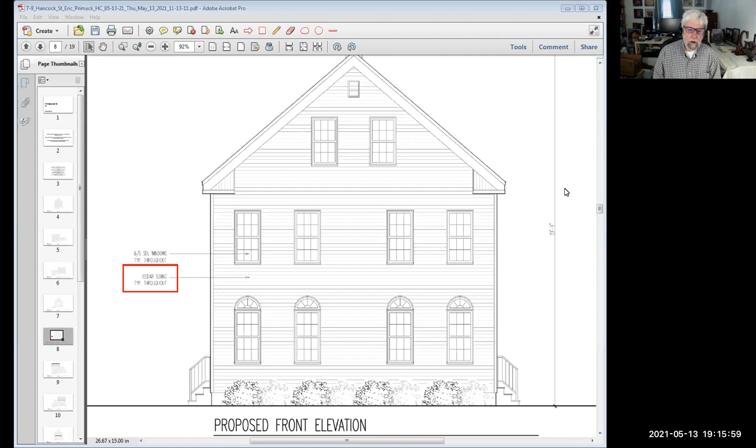Somewhere I saw, I'm not sure where, that some of the existing windows were true divided light, but it's not clear - my memory is failing me on that. Are all the existing windows SDL windows, Eric? They are. So one of the questions some board members had was, which, if any, of the existing windows in the part of the house you're not affecting do you plan to replace, or have you not gotten that far yet?

Most of them are in decent shape, some are just a little older. I think one side of the house was done over several years back, and the other side wasn't. The owner lived on the left side for a long time and replaced some of his windows, so the ones on the right side are a little older.

Again, they're just replacement windows. We'll pull them out and put in the same things if they're in poor condition. Just looking at this photo, I'd be willing to place money that the two windows up in the attic space are older, possibly original to the house, and the lower ones were replacements.

Now let me turn to my fellow board members to see if someone wants to comment. I'm particularly interested in the board's opinion on this. I got the impression last week that people felt pretty strongly about the vinyl siding. Do people still feel that way?

Anyone? Oh, Joe. Yeah, I feel strongly about it. I think all of this vinyl siding should go away, including all of the trim and accessories around the windows and at the corners.

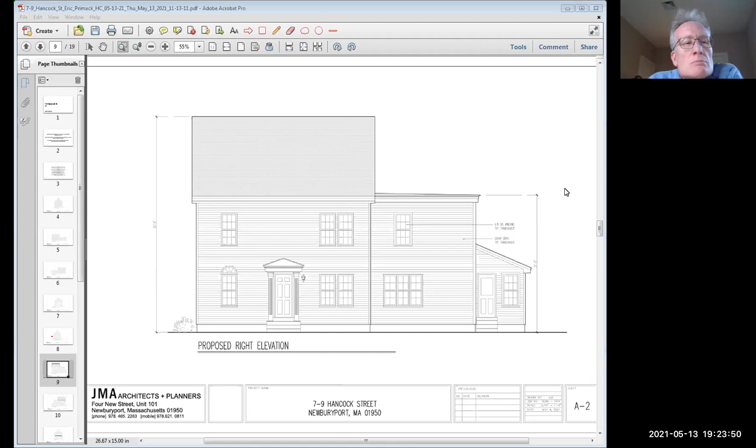Mark, you were here, your vote on this motion? Yes. Chris, you were absent, right? Yes, I'll recuse myself. Peter, you were here, your vote? Yes. Joe? Yes. Patricia was absent, I'll put her as a recusal, and the chair is also a yes. So it's a vote of 4 affirmative votes, which carries the motion.

I'll inform them - well, they're here, Caitlin and Andy are listening to all this. But I will formally let them know that the demo delay can be lifted on the basis of your revised plans, Mr. Primack. Thank you very much, and we appreciate your cooperation on this. We're aware it's going to add cost to your project, and we're not insensitive to that.

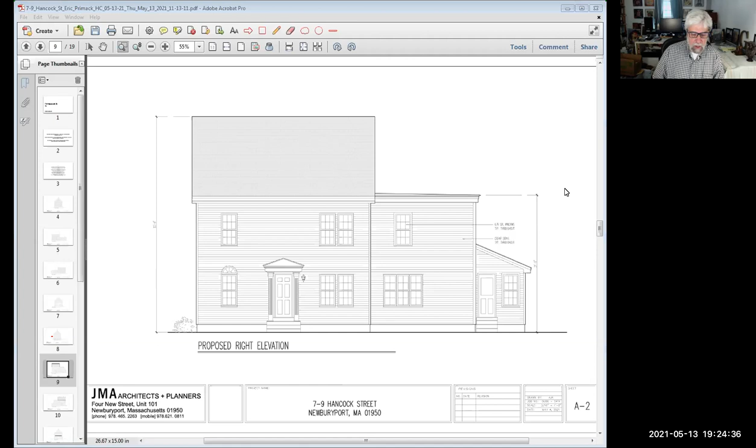Hopefully in the end people will understand why we're being persnickety about it. Okay, I get it, I'll make it look nice. Very good. Thank you very much. Bye-bye.

Okay, meeting agenda: 5 Park Street, that's a little street between High Street and Harris. The applicant is seeking to demolish an existing single-family accessory structure, a garage of some sort, and reconstruct a new one in a conforming manner - conforming to zoning restrictions for setbacks, height, and so on. So we need to do the usual considerations: determine whether the existing structure is historically significant and whether it should be considered for preservation. If we deem it significant and it should be preserved, we'll need to go into the demo plan and have a public hearing.

Who is this? I believe this is the applicant represented - yes, by MTC. Who is presenting for the applicant, the attorneys? Yes, thank you, Mr. Chair. Lisa Mead, Talerman Costa, 30 Green Street. With me this evening is Scott Brown, the architect on the project, and we're here on behalf of Boston North Development, the contractor for the owner of the property.

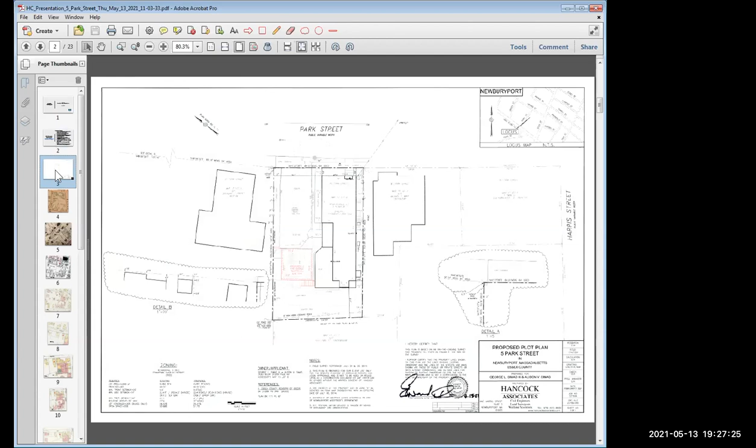So if you go to the next slide, please. So here's the site plan. This property is located in the R3 zoning district in the downtown overlay district. You can see underneath the red is the proposed new structure, and underneath that is a dashed line of the existing smaller garage that exists at the rear of the property, adjacent to the house and in between the sideline.

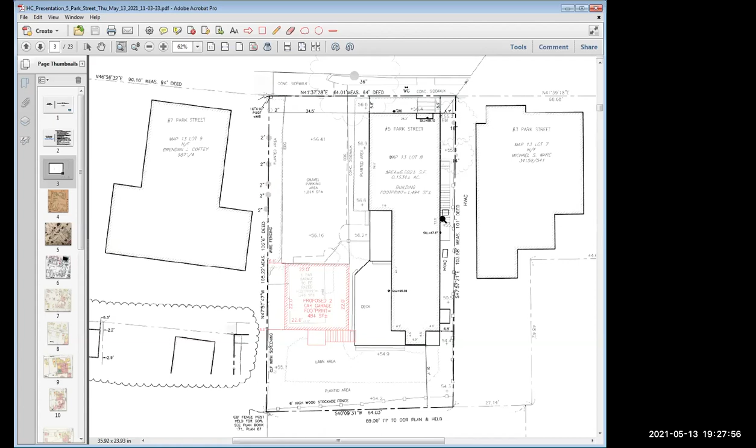Thank you. So here, as the chair indicated, Park Street runs parallel to State off of Harris and in between High and Harris. Here's the 1851 map. You can see the existing single family structure. There's no outbuilding on this map.

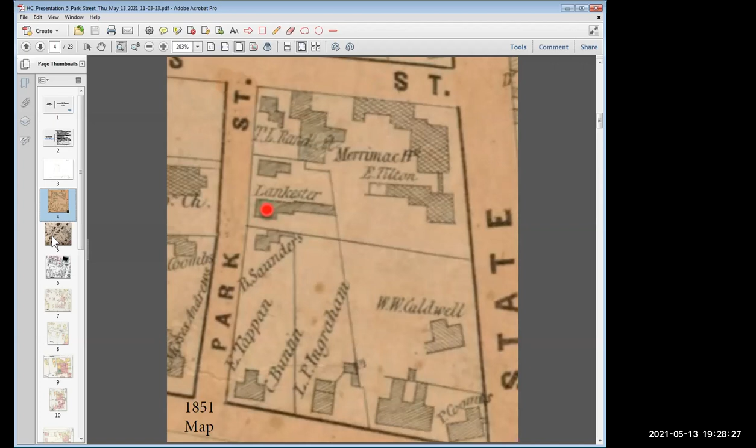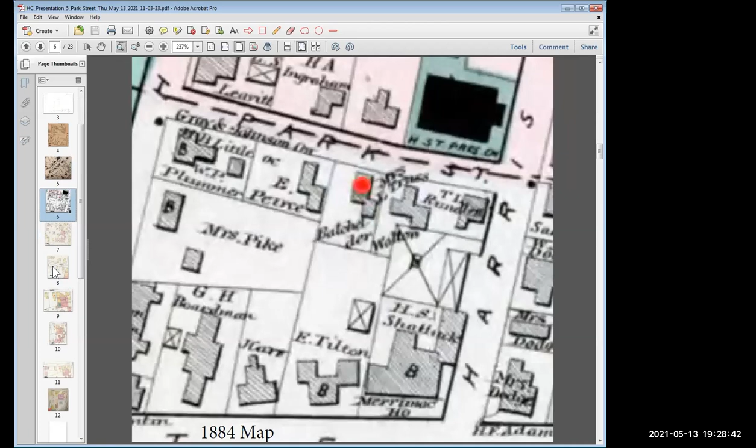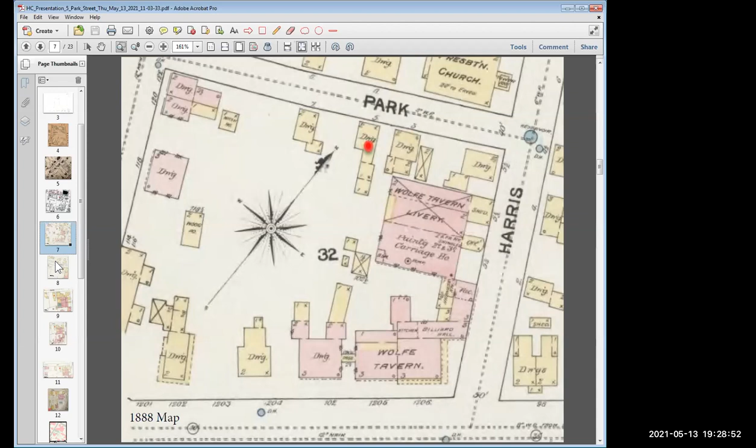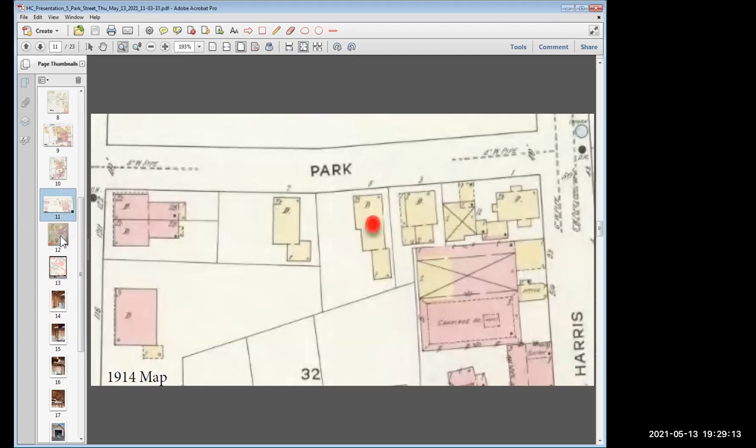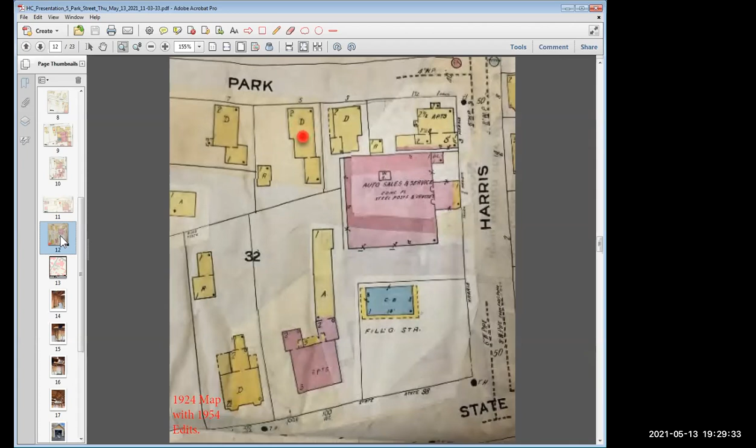And 1906, no outbuilding. And again, 1914, no outbuilding. And then there appears on this 1924 map, which had some later edits, an outbuilding at the rear, pretty close to the property line. These are certainly not all scaled, but they were pretty good, so it's pretty close to the property line. And the next slide, please.

And here's today's assessor's map. It's close to the property line, but not as close as it appeared before. It's small. So therein lies the issue.

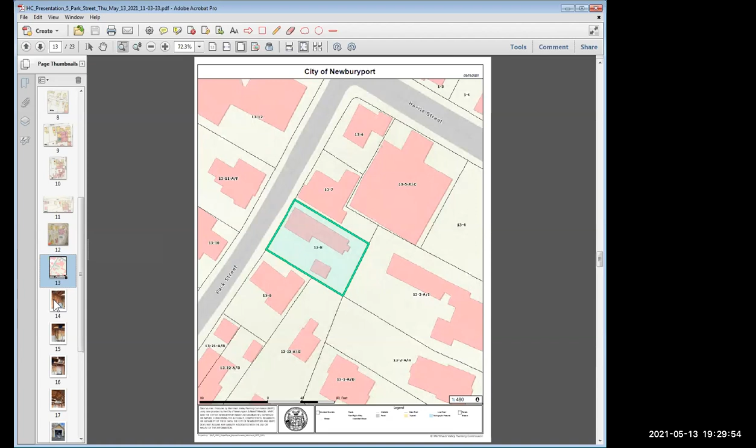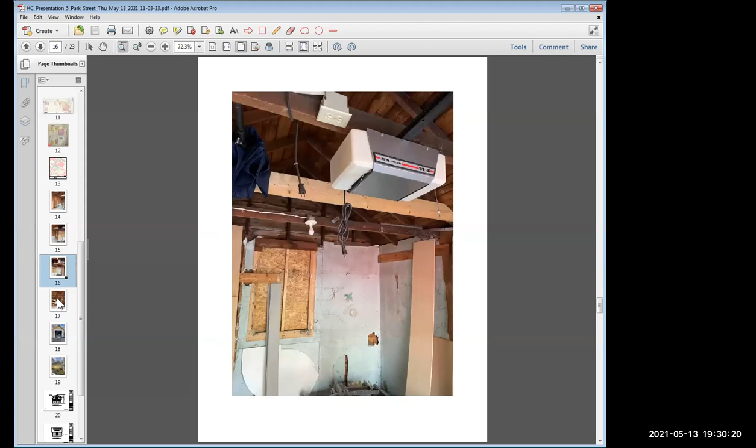And so what I'm going to do is turn this over to Scott and let him go through what he is proposing to do. He's actually, I believe, been on site and looked at the barn, so I'll let him give you a little more detail on the condition of the materials in this garage.

You think, excuse me, Ms. Mead, do you think that would help our determination as to historical significance? The materials? No, what Mr. Scott is, or rather Mr. Brown, Scott Brown, is going to talk about?

I do. If you go back to this, I don't want to move down to the proposal yet. Okay, okay. So I know you want to make these two different determinations before we get to the proposal, right? It might not even be necessary, but I would like Scott to talk about the materials a little bit more, since he's been there and would have more knowledge in that area. Okay, no problem. Oh, thank you, Lisa.

Could we just go back to slide 14? Here we go. So, as far as I can tell, I don't think that this structure is particularly old. It looks like the sheathing is sort of a southern yellow pine beadboard. The framing is fairly clean looking. And the dead giveaway to me is that this thing is actually sitting on a concrete slab.

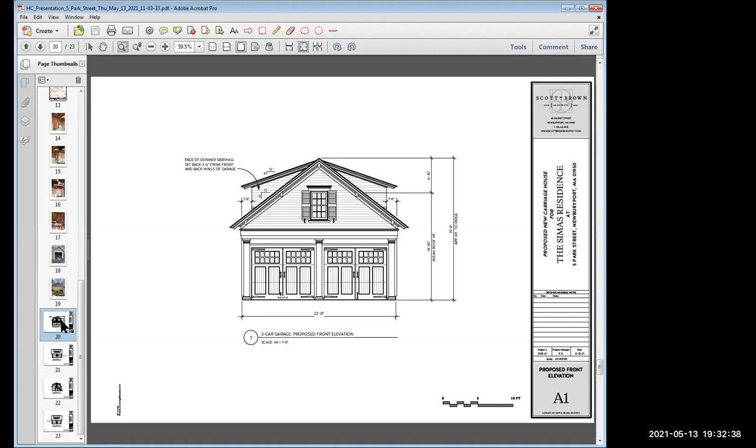So this is my proposed front elevation of what we're planning to do here. The source of inspiration for this design was another garage I designed about 10 years ago at 290 High Street, a fairly prominent garage that a lot of folks really like. Unfortunately, at the 11th and a half hour, I wasn't able to find a photo of what we did there, but perhaps some of you might have a mental image of that. So this is the next generation of that.

The Simases, owners of 5 Park Street, approached me and wanted to do something similar to what we did at 290 High Street. This one is designed to meet the accessory structure requirements of the zoning bylaw, meaning it has to be no larger than 24 feet by 22 feet by 15 feet tall. This one's slightly smaller than that, and also slightly smaller than the garage on High Street. The box is 22 feet wide by 22 feet deep, and comes in just under 15 feet as measured to the mean roof height.

It does have a couple of small shed dormers. Both of these dormers meet the city's requirements, meaning the cheek walls need to be set back from the front and back of the main box. Also, the side walls, as shown in this drawing, need to be set back from the wall below at least 18 inches, and we've certainly done that. So these dormers do create a little bit of space above the garage.

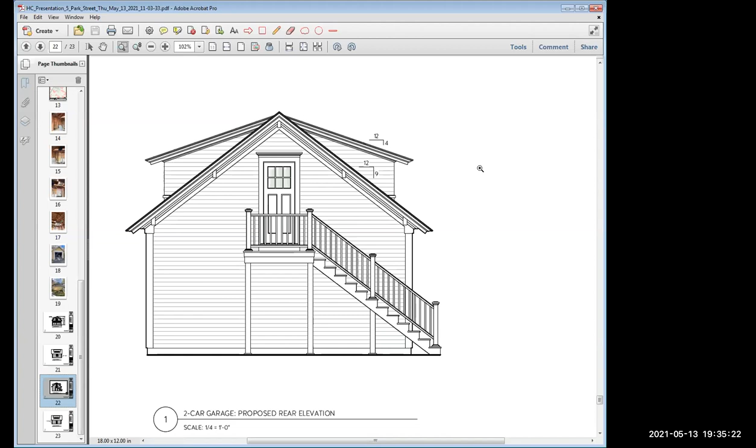So if you can go back up to slide 19, or even 18, please. The request first, of course, to the board is that, in fact, to make a determination that the building is not historically significant and therefore can be removed. And that's it for right now.

Is anybody there? Glenn, I think you're muted. Duh. Thank you.

Fortunately, I haven't really said much of anything yet. So let me turn first to the board to hear your impressions. Does anyone care to opine?

I know a couple of board members have often expressed opinions on accessory structures, this being an example of one. As an aside, Scott, I have a garage built on a concrete slab at my property, and I think it's late 19th century, just FYI. But anyway, I don't really disagree with your overall comments, particularly given the nature of the way it's framed and so forth. I think it could be — well, it's hard to say. It also looks like they used whatever scraps they had around almost for sheathing — you wouldn't normally use beaded board for sheathing and so on. But anyway, I digress. So panelists — board members here — what do you think?

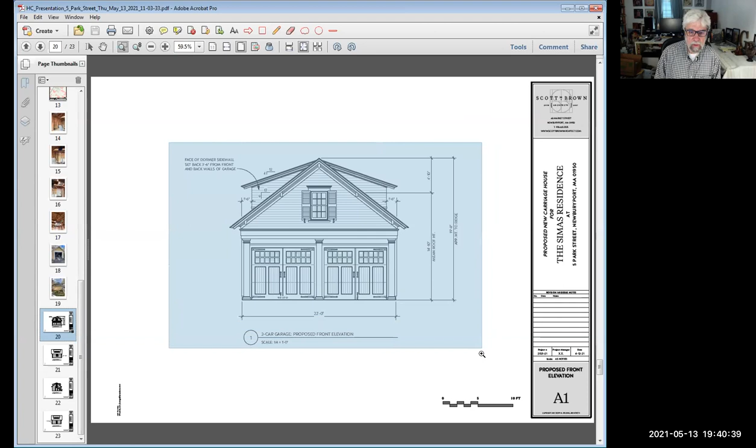Hey Andy, could you go to slide 20 for a second? Just a quick question on that. I think we can all agree the overall result is going to be an improvement to the property in general. I was curious, Scott, I noticed you've got those three column-like things in the front, I assume they're pilasters or something. Were you trying to capture that Greek Revival spirit with the outbuilding as well, to go along with the house? Yeah, that's the idea, trying to make it a very classical front facade. It's also nice when you can project those out and set the garage doors back a little bit, which is one of the side benefits of putting those columns on there.

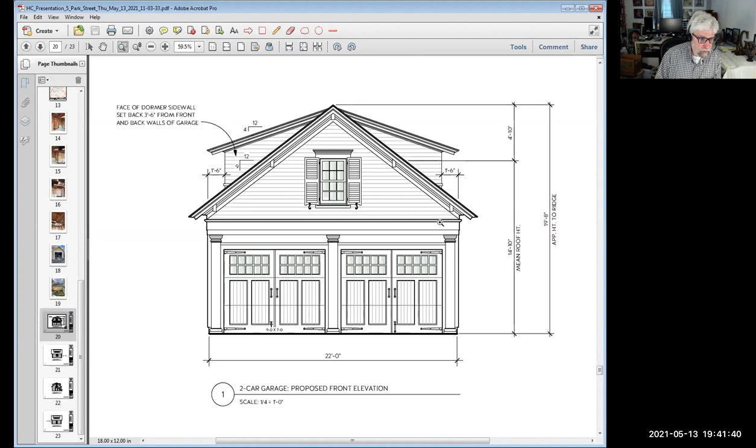Okay, very good, a very formal design. Well, thanks very much, so you're free to go, so to speak. Unless you have any questions for the board before you take off? No, I think we're all set. Thank you very much. Thank you, Attorney Mead, okay, very good.

The agenda again, the next two items are requests for advisory review, although each is its own different thing, which I will explain when we get into them. We'll take the first one, that's 21 Pleasant Street. Anyone who's been in town more than a minute is probably familiar with Pleasant Street, off State Street, where the Cumberland Farms is, and the famous Unitarian Church and so on. So this is very much in the downtown overlay district, and the rules of the ordinance regarding the downtown overlay district apply.

The applicant, some of you may recall, the Szechuan Taste restaurant was in this location, if I'm not mistaken, and they have a project about relocating the door. So without me saying anything else for now...

Before I do want to say something else actually, since we have some new members, I rechecked the ordinance just to make sure I had this straight. So on a DOD permit, almost anything requires a special permit, and the granting authority is the planning board. That's similar to, you might recall, 93 State Street, that was the Institution for Savings. There, the planning board had to decide whether to issue a special permit.

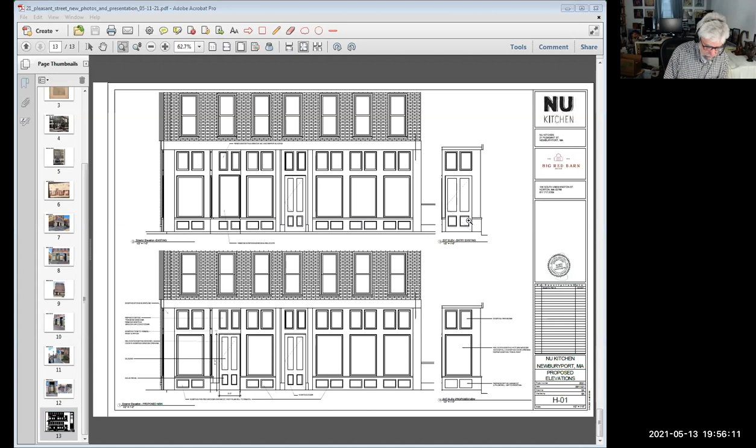All right, let me make a note. There was no public comment. So we had our discussion, I'll make a brief note here. Thank you, board. What I'll do is send this off to the planning board, who are the ones that will need to give you the permit, along with an advisory or historical report from the historical commission stating that we do not see an adverse impact from your proposed project. I would imagine they would probably give you the permit unless they have some other concern that I'm not aware of.

Great, okay, thank you. You're quite welcome. Thank you for coming in, and good luck with your project. Thank you.

Just give me a second here, I need to make a note. Okay, then.

The next and last major item here is another advisory review, 276 High Street. This is similar but different. We need to compose a report for the Zoning Board of Appeals, which is the Special Permit Granting Authority, or SPGA, on special permits allowing demolition under the Demolition Control Overlay District, or DCOD, ordinance.

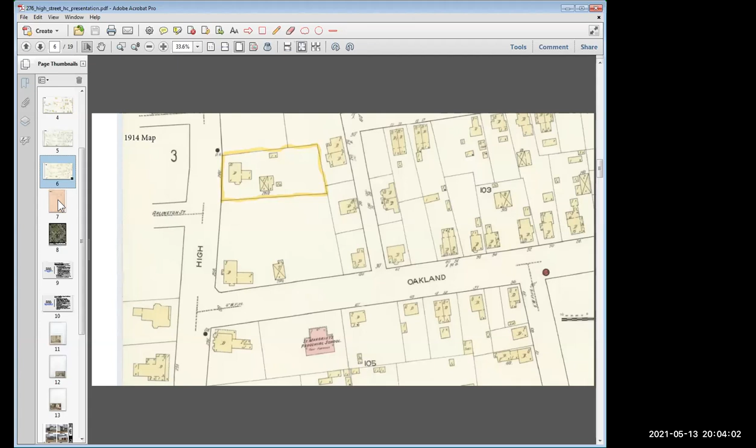And this is the 1924 City Assessors Map. We have an addition on the side, as well as the additions on the back. So that's kind of the progression of the additions based upon the Sanborn maps that we have. So it's clear that the barn over a number of years has undergone several transformations by the addition of sections to the south and to the east.

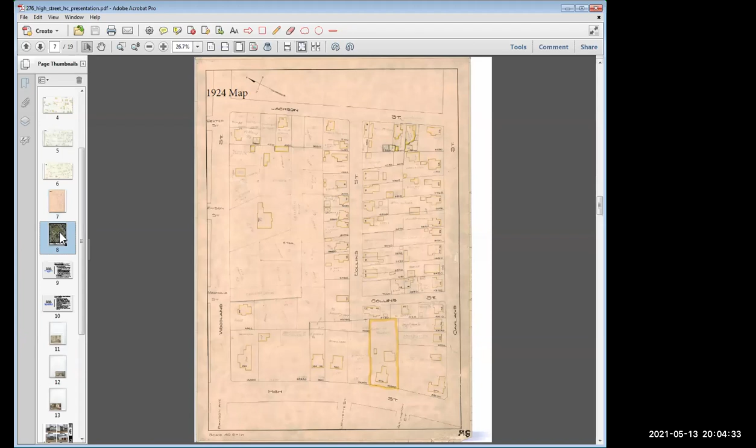If you can go to the next slide, please. And here we have the current condition today. You can see in this GIS map the later added addition on both the side and the rear of the structure. When we show you photographs in a little bit, you can see that much clearer and more distinct. So I'm going to do an overview of the conditions, but then I'm going to turn this over to Aaron, who has done a significant review of the structure itself.

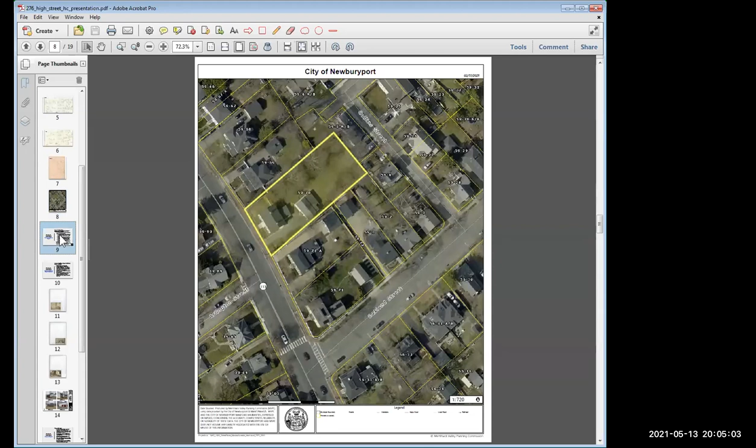So if you go to the next slide, please, Andy. As I noted, the barn had two significant additions since its original construction: the 10-foot wide addition to the right side gable, as you view it from the driveway—Aaron can talk to you in more detail about that—and a second addition along the back eave wall of the original barn, which Aaron will also discuss. The barn sits on stone and brick partial foundations that are crumbling, and the first floor framing has been greatly altered, with little remaining from the original structure. Next slide, please.

And so I'm going to turn this over to Aaron at this point before we get into the historic photos to talk about really the current condition of the barn.

This is Aaron Sturgis with Preservation Timber Framing out of Berwick, Maine. Thank you for having us tonight. It's one of my favorite things to do is save carriage barns on High Street in Newburyport. So this one is a gem, but it has been altered over time.

The historic photographs you'll see next will show that. As a precursor, I looked at the barn extensively at Chris Ragusa's request. It was very apparent that the additions were later than the original structure. The original structure is fully timber framed. Unfortunately, when the additions were put on, they did compromise the timber frame structure, and there are structural repairs to be done, but they're relatively straightforward. It is a light timber frame, but it is fully mortise and tenoned, and very nicely done.

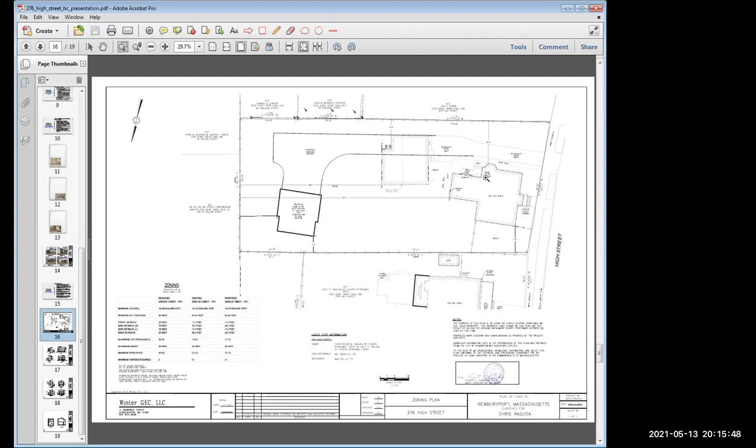So the proposal is, and I'm going to turn it over to Scott right now, the proposal is to build a new foundation for the barn and move the barn to a new location on the lot that better serves today's functions, but preserves the barn. So Scott, I'm going to turn it over to you.

Okay, well, thank you, Lisa. So we've positioned this in the back left corner of the lot as you face it from High Street. As already mentioned, we've positioned it in a spot that meets the zoning setbacks. We've oriented so it is parallel to the house, and we've positioned it in a place which gives us maximum flexibility to make use of the backyard. As Attorney Mead already stated, this is a great yard and it's lined with massive mature trees, which really give it a nice sense of privacy. Unfortunately, the current position of the barn hinders one's enjoyment of that yard from the perspective of being in the house, so locating it to the back left corner is certainly going to open things up.

Next slide, please. So these are existing condition elevations. A lot of this Aaron has already covered, but really what we're trying to do here is clearly indicate those areas that we are proposing to remove. The front elevation is in the lower right-hand corner, and right there we're indicating that third bay, which Aaron spoke about, that we're proposing to remove. The other three elevations indicate those later additions that we're proposing to remove as well.

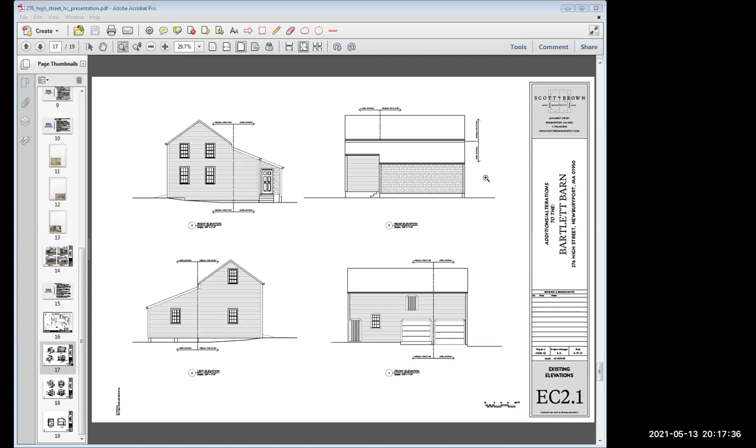Next slide, please. So these are our proposed elevations. The proposed front elevation of the barn is in the lower right-hand corner, and again you'll notice that we're returning the overall box to its original size. In the lower left-hand corner, we're proposing a door, more or less in the same location that it is now. On the right side, we're proposing a larger utility type door, more or less in the same location it is now. Front elevation, we're showing some rooflets that have metal on them, covering those doors. I think anytime you can provide a little bit of cover over a door, it certainly prolongs the life of it.

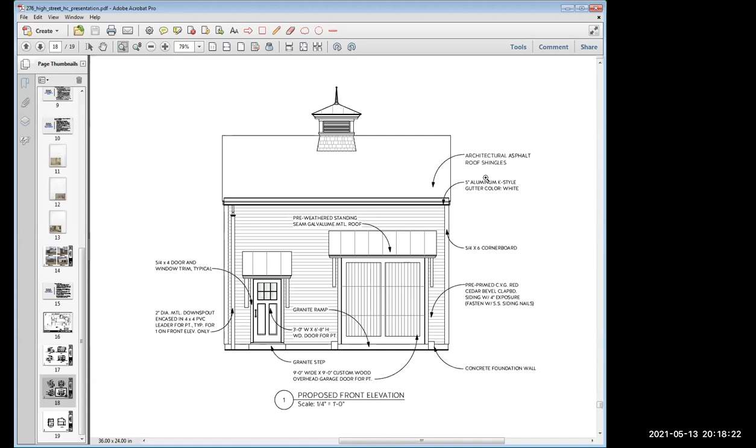The other three elevations on the sheet, if we could just zoom out a little bit, show this addition that we're proposing off the back. You'll note that it has a very simple shed roof, coming in very cleanly under that existing eave line. We've set both sides of this back about 18 inches on either side from that original box, and we're proposing to clad it in a different material, white cedar sidewall shingles. Really the idea here is to make it distinct and to be very respectful of that original form. You can actually see from the material notes here that we are proposing a high quality project.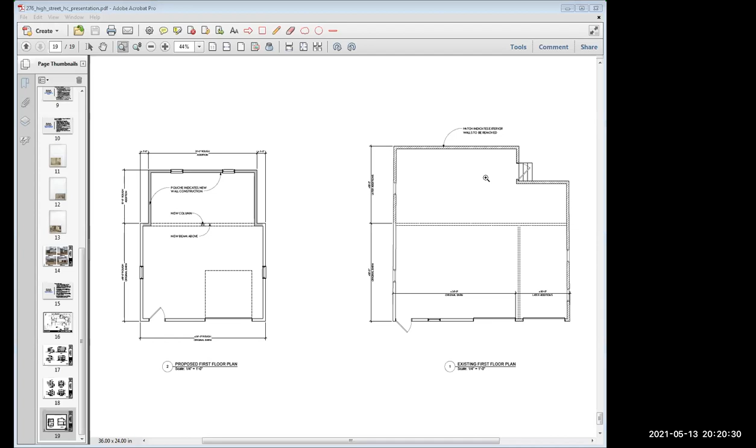And I think with that, I will hand it back to Attorney Mead. Thank you, Scott. So I think we'd love to hear any questions that the commission has at this time. We think we have given you a lot of information and historical information relative to the house, the barn and its significance, and how we propose to do the demolition, and quite frankly, preservation for a much longer period of time of the original structure. So we would welcome any questions you might have.

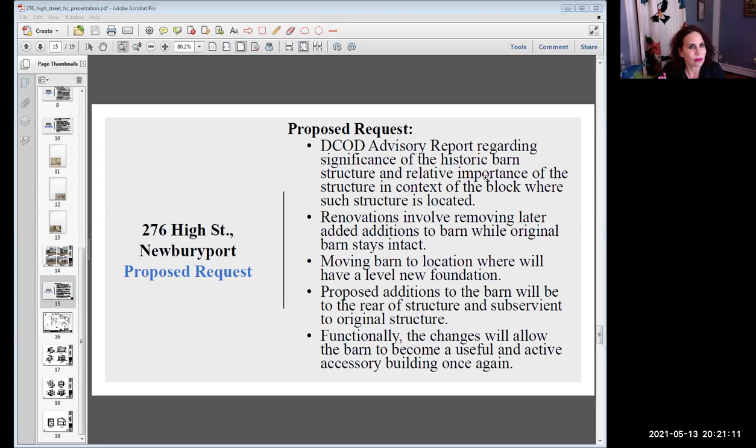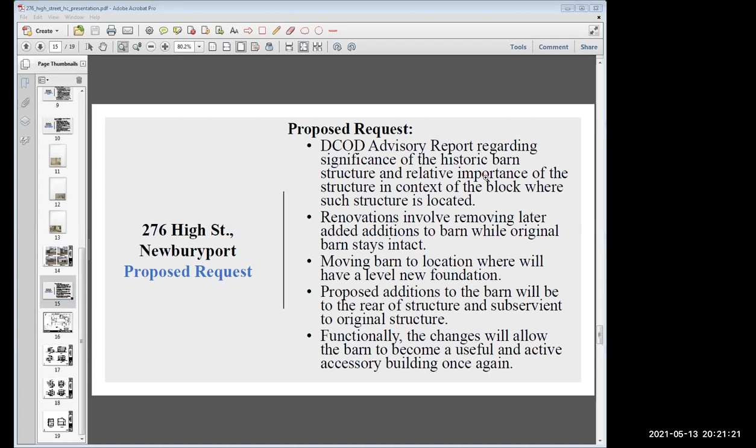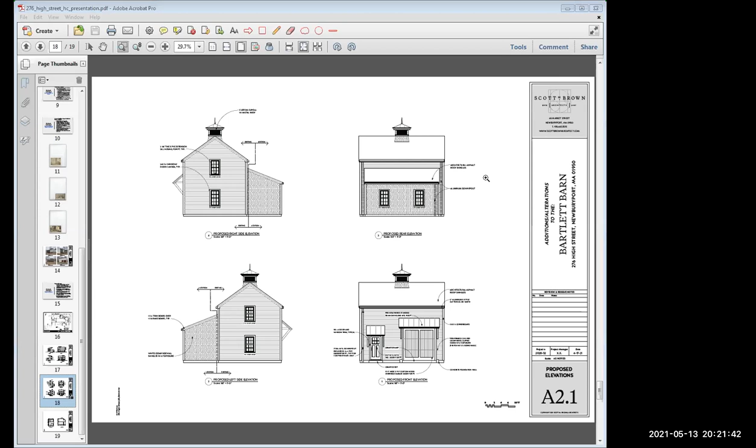Thank you. I see Patricia's got a hand up. Patricia? Yes, I have a few questions. So the first question is, what is the percentage of demolition that will be done, and why was it not calculated in the application? It doesn't have to be calculated, because it meets the definition of demolition because we are moving it. If we were not moving it and we were taking off those exterior walls, we would calculate the amount of demolition to see if we fell underneath the 25%. But it doesn't matter here because the mere act of moving it is considered demolition. Yeah, no, I understand that. I was just wondering, in addition to counting as demolition, what percentage of, how big are the additions?

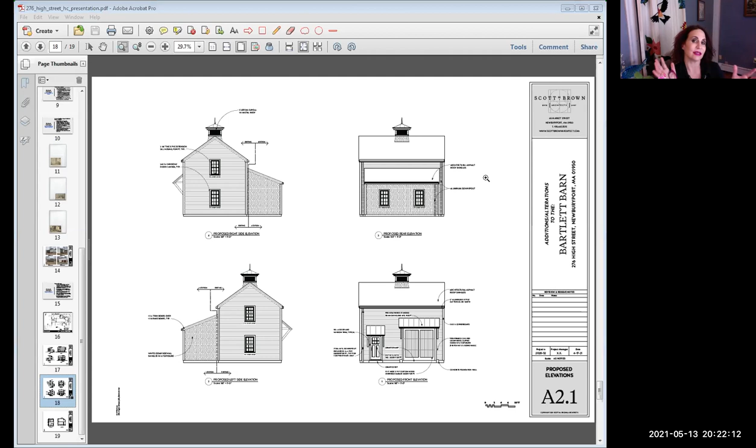I see in my notes something says 768 square feet, and I don't know if that's the footprint of the existing historic structure, or the footprint of the original building with the additions and that 10-foot addition on the side. I'm trying to understand what is the size of the barn now, and what will the size of the renovated structure be, and what percentage of it will remain.

So I was answering the first part of your question, which is why we didn't do a calculation of the 25%. That's why we didn't do the calculation. I don't know if Scott has those numbers, at least the footprint, off the top of his head. I don't know if I can.

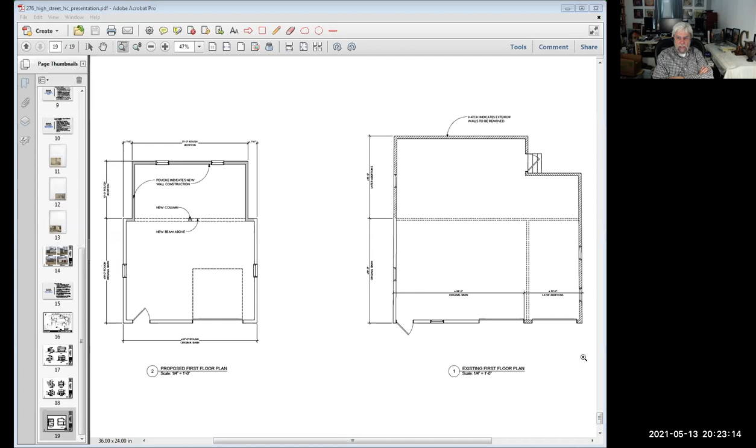Well, on slide 19, if those are to the same scale, you could get an idea, because it shows the plan view of the new, proposed, and existing side by side. I assume they'd be to the same scale. I did have some dimensions on there if we can zoom in. So Patricia, the existing one is to the right and the proposal is to the left, so you can kind of get an idea. I understand, I can get an idea if I study it for a long time. I was asking if the numbers were available.

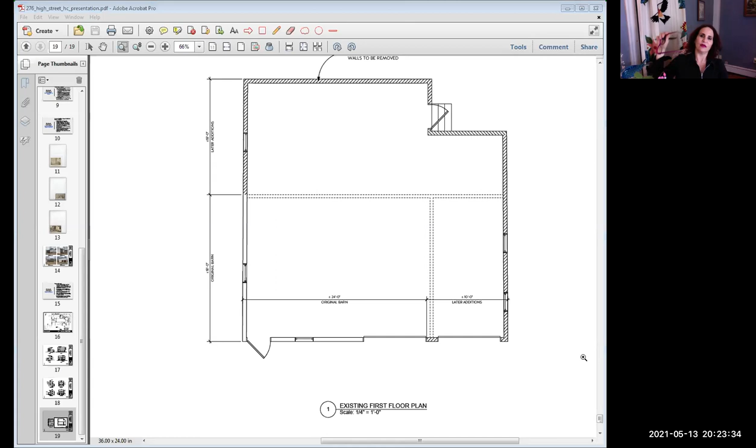So the next thing I was wondering about is how many feet from the house is the carriage barn now, and how many feet away will it be when it's relocated to the back corner of the lot? Because we can't see it from the pictures when we're standing in front of the house. It's very prominent, very close to the house, as such structures are. So I'm just wondering what's the distance from the house according to the site plan.

Again, I could zoom out and do the calculations, but I thought it'd be better if you could just let me know so I can take notes. I think in the site plan there's no exact measurement, but it looks like it's in the 15 to 18 feet range from the existing back of the house. And we're clearly moving it more than about 100 feet away from that.

Okay, some of my other questions were answered by the cupola question, I guess. I thought that was conjectural. I think it's great that you had the historic photo to show that it was there.

But the other question is about photographs. We were always hoping to get photographs of adjacent buildings and the setting, and those photos are particularly important to me because it's next to Ken Widmer's house, and that house has the most comprehensive, meticulous PR I've ever seen. So it would have been nice to see it in relation to adjacent buildings and the setting. I wish the developer had offered those, but I guess most of my concerns were about the size, the percentage demo, and how far away it will be compared to what it is now.

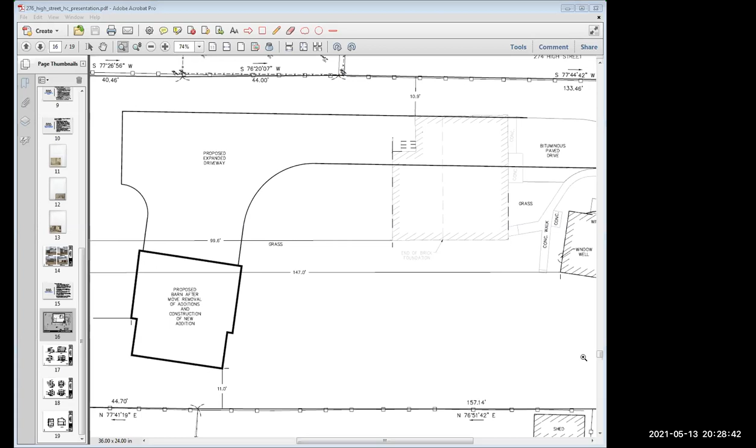Mark, was your concern mostly around things like drainage and permeability, or appearance, or both? Well, it was following your thought about the relationship of the house and the barn, and the fact that they do seem to have sort of a purpose in their position. Repositioning it all the way at the end of the property on the left seems to me to not make a lot of sense and allows for a huge area of the garden to be taken up by a driveway. But if the plans are not set yet, that may be a moot concern.

All right, thanks, Mark. Who else would like to opine on this? Any other comments from the board here? Christopher, I see a hand.

Yeah, I just, you guys beat me to the punch on that, but I would echo what Mark said, which is echoing what Glenn said. And maybe just make the case that, looking up the streetscape on Google Maps, straight on, there's a benefit to the street, to the community, to see the barn, as opposed to tucking it behind. And Mark and Glenn are making sense that you're actually losing backyard, it seems like. So I'd like to see maybe a rethink.

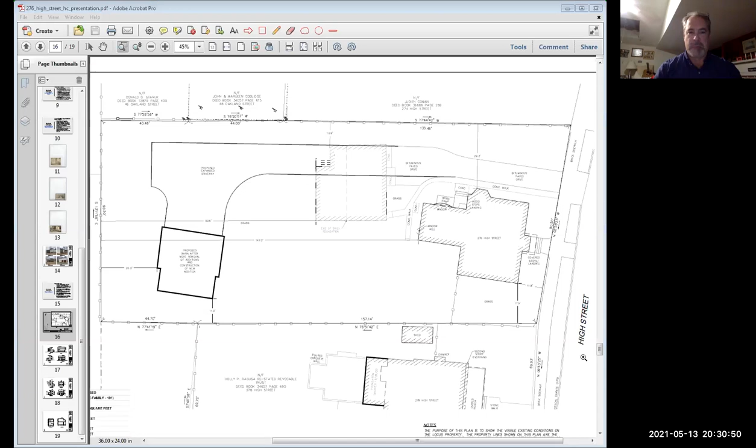And I understand all the engineering and construction aspects of it that need to be altered. But if I'm on the sidewalk or walking down the street, I can see the barn, I can appreciate the barn, and we don't always see that. It's not a garage. We're making the assumption here that it's going to be restored to something that's a little bit more original in a sense. So we lose that if it's tucked behind.

And I know that the homeowner maybe has an advantage, but I'm not sure. Again, if you add up the square feet, I don't know if the homeowner's in the audience, but it would make more sense to me to have more of that backyard. I suppose. And I'll ask Mr. Sturgis perhaps to comment on the doors, because I don't know the answer to that myself. I don't think what's there today is original, but I'll let him comment on that.

And I'd also like the board to, I haven't heard anyone express problems with demolishing the newer parts that were added on that are in poor condition. So I'd like to hear also, are we about that, or are we still asking questions? I'm uncertain of what's happening, because I have a lot of things that I wanted to say, but I didn't want to get ahead of people who had questions.

Or I would say we're deliberating. Oh, okay. We're deliberating. Okay. Okay.

It's a combo package, so to speak, because there are also some questions like this one on the floor that I'm hoping Mr. Sturgis can shed some light on regarding the doors, and then we can go back to Patricia for other thoughts. Sure, if I could jump in, by door I mean not the two garage doors we see in front of us, but the old door with the old hinges.

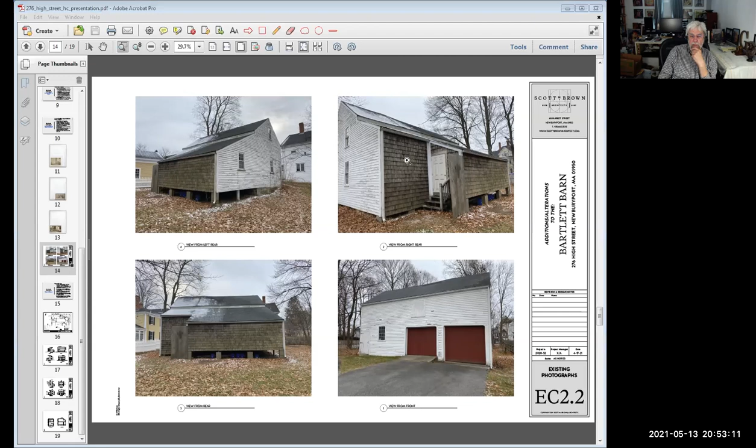There's no question that the standards are such that even things that were quote-unquote later added, when they're that old, they become historic in their own right. But then you have things like condition and compatibility, and often it's the condition. We've seen a number of cases where, under the category of 'they don't build them like they used to,' the original one was very well built, but the later additions not so much - and according to Mr. Sturgis, they're actively hurting the original structure. My sense is we would probably all agree we would love to be able to keep the original timber-framed carriage house or barn, whatever you want to call it.

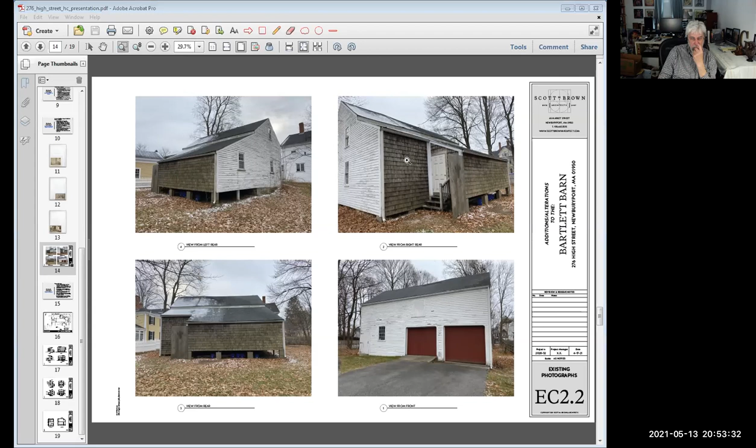I worry that you walk by in 5 years and we're saying, oh great, the view corridor is preserved, it's not really historically where a carriage barn is anymore, but we did preserve the timber framing. You walk by and there's a fence and a swimming pool and you kind of go, oh yeah, remember when that was the carriage house.

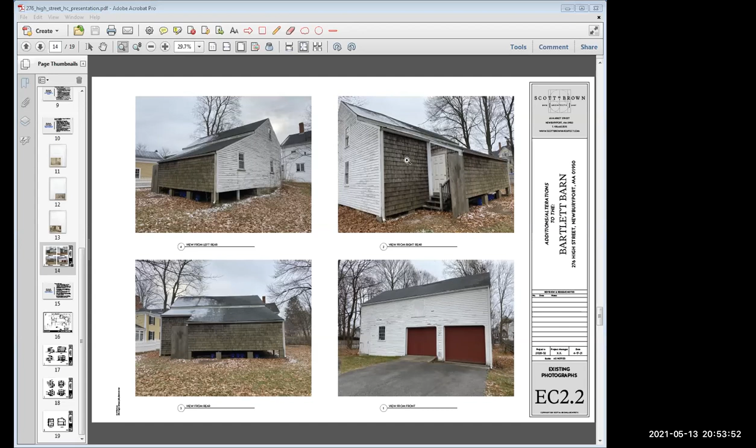So I wish somebody else would help me, someone else on the commission. Andy, could you go to slide 11, I just want to put the photo up for a perspective on the original, and then I'll be quiet. I didn't mean to interrupt, I just thought it would be good to have slide 11. Thank you.

Yeah, and that big old tree is gone. So anyone on the board? Chris, welcome. Joe, anyone have a comment? I'll throw in, I want to see hands. This is Peter, I'm unmuted.

Like Patricia, I'm conflicted on some fronts on this. The structure needs to be saved, and in its current condition, on its current foundation, it's going to continue to deteriorate. So if we have an opportunity to do something about that, we should, and allow the owner to do something about that. And certainly they have the right team to do it.

When I first looked at it, I thought, okay, that's not bad. And I take what's being said - I think it was Mr. Sturgis, or maybe it was Scott Brown, who said that you still can see it, there's a pretty good shot. And if you look at the slide with the Google Maps image, there's certainly plenty of room to see it all the way back there if you're walking down the street. But it does significantly change the character of the property in doing that.

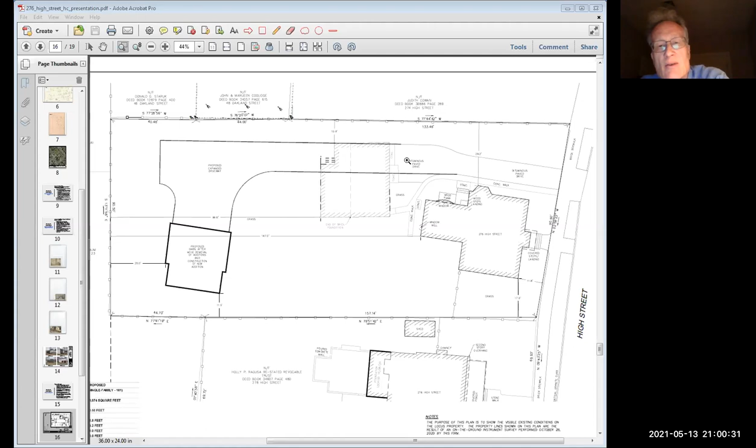Yeah, I totally agree with everything Peter and Mark have just said. I feel the same. There's something very strange about this project, and I can't really understand why you would move it to the back of the site if it is actually currently serving as a garage. There's something about the discussion of use and adaptive reuse. If it were a different use, I don't think anybody would logically place their garage at the back of a site and then walk back to their house every day. That doesn't make any sense.

So, okay, it's a workshop. I mean, it's not a barn. There's no animals there. It's a workshop. So you're going to move it away from the house because maybe there's noisy equipment. I don't know. I don't know if that really is part of what our commentary should be. We've been steered to really just talk about it as a historical structure and the infinite detail that goes with the disassembly and reassembly of that elsewhere on the site.

And okay, that's fine, but I totally agree that there's been no talk about the ensemble of the buildings, including the house itself, which is actually in need of some stewardship. That's what we're talking about. The main house, which faces High Street, needs some scraping and painting. And I understand that you can't do everything at once, but it's odd that this particular barn, quote unquote, has been targeted to be relocated elsewhere on the site and put down a lot of blacktop.

I'm going to go, since I don't really know what to add to the conversation, I'm confused by the project. I'm going to go with what Mark just said, that really, I don't see any reason. I think it's really important that the ensemble of the buildings remain intact, the way it faces High Street is very important. It's the ensemble of the house and its associated accessory carriage building. And I think that's what I want to go with in terms of my own understanding of what it is and what it should be. So thank you. Well, thanks, fellas.

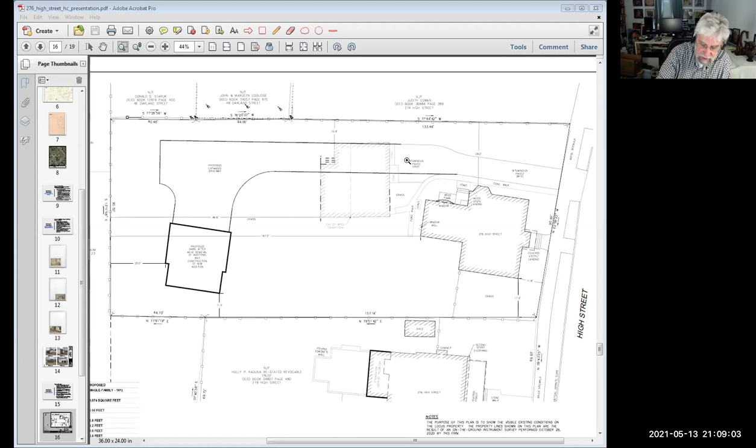Thank you, Attorney Mead. Based on how these things work, my sense is you're trying to get a good and clear sense of the board as to what we're okay with versus what we're not so okay with, and what we're definitely dead set against, to sum it up. I think you summed it up pretty well. I didn't hear any serious objection to what I called the salvage job—it's really more of a restoration, would be a more appropriate word.

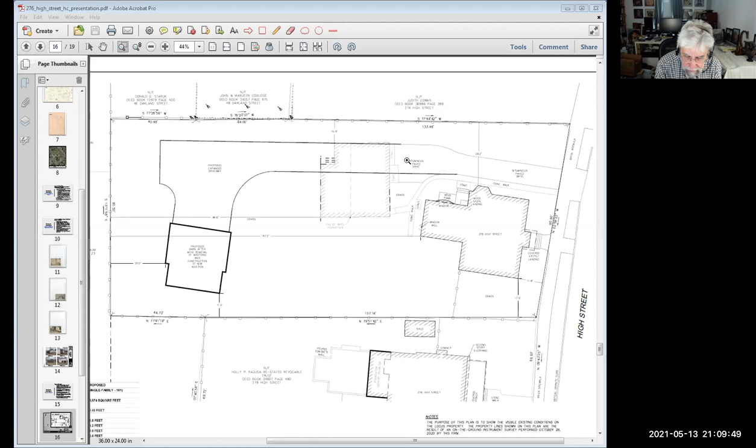Which I think we'll agree that what that consists of is removing the deteriorated later additions and restoring the timber frame barn. And then you also commented on what we said about the design maybe being a little bit grander than we would have expected.

So the one that we're concerned about, I think you mentioned what you called a pinch point. I assume you mean, especially with the existing size of the structure, between the house and the barn, and between the barn and the property line, there are two relatively narrow passages. Right on the property line side, a little over 10 feet between the house and the barn, 12 to 15, something like that. So they're looking to get a little more space there.

And it sounds like one of the ideas you're kind of toying with is, of course, with the later addition on the right removed, the barn will be narrower, only about 18 feet. Yep, okay, 18. Yeah, I'm thinking of the one on Park Street, sorry.

And having, let's call it the right-hand side, I believe that's kind of the southeastern side, have that be about a similar setback as it is today, something like that. It opens up that so-called pinch point between the house and the barn. There'd be a lot more room there, especially if it's moved back a bit. Is that kind of what we're talking about?

Right. And so the key word there is 'a bit,' right? You want to quantify it, eh? So really we're looking, again, at moving it back further towards the rear of the property, but on that same line that you just described.

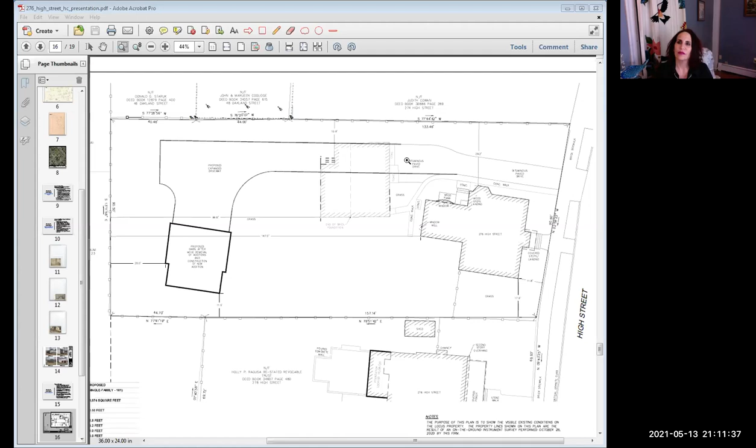Yeah, Peter had his hand up. Glenn, maybe Peter was going to comment on this topic. I'm not sure. Well, nope. No, I did. I'm just having some computer issues and I've lost all my images, but here they're coming back.

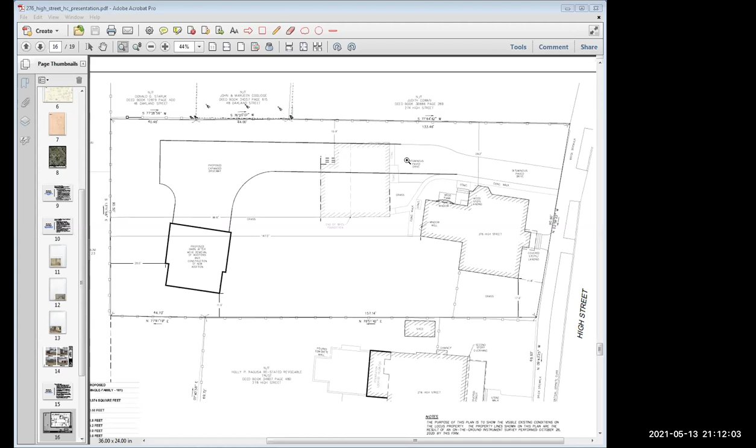Can we get that image back up, Andy, that showed the house and the carriage house together? You're talking about one of the historical ones, Peter? Yeah, or current? One of the historical ones. Yeah, I think it was probably 13, either 13 or 14. I think 13 was, I mean, most. That's the image. Okay, hang on a second. Everything is jumbled up on my screens here now. Sure, okay, there we go.

So move it somewhat back, maybe move it off to the right, open up that space between the two buildings a bit to make that a functional space. And that I would be totally right behind.